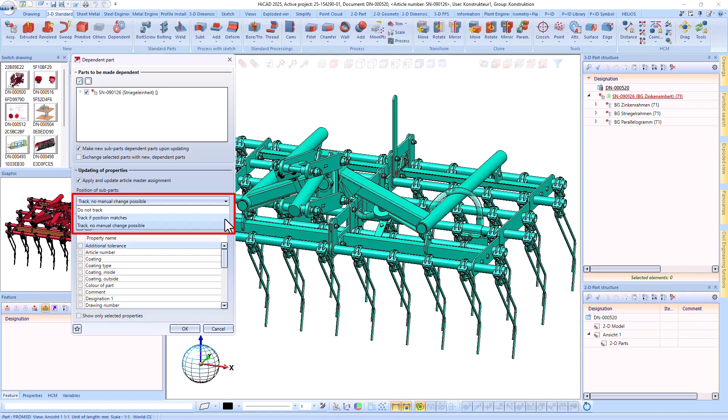In this video, I would like to show you the new features in modeling. When working with dependent parts from assemblies, the previous option "track geometrical position of subparts" has been extended. In addition to the familiar options, "do not track" and "track if position matches", there is now a new setting, "track, no manual change possible". This ensures that the subparts remain in their position and are reset if required when a manual change is attempted.

Previously, it was also possible to change the part structure of dependent assemblies. These changes are now generally prevented.

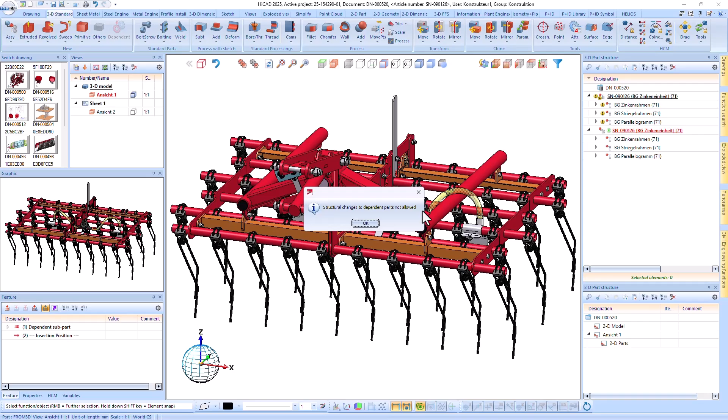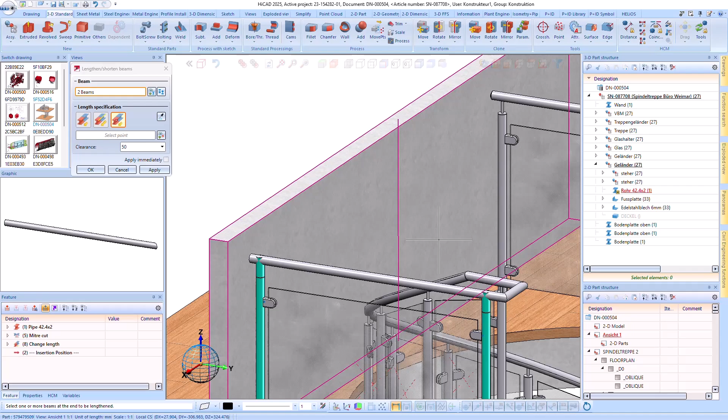A highlight in this service pack is the revised beam lengthening function. With the new interface, which is designed similarly to the lengthen sheet function, you have all the editing options in one place. Importantly, you can now change multiple beams at the same time, regardless of the type and endpoint of the beam. In addition, the pipette symbol can be used to pick the total length of another beam and apply it to other beams.

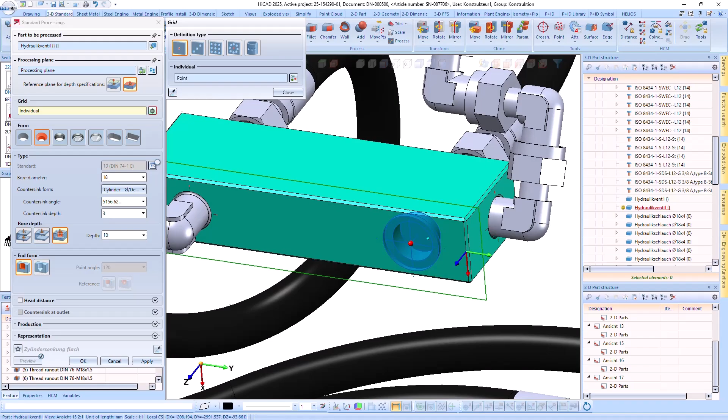Another highlight concerns the standard processings. Here, it is now possible to create countersinks as blind holes. This expands the options for creating stepped bores more easily. There is also an adjustable countersink as edge processing for bores and countersinks.

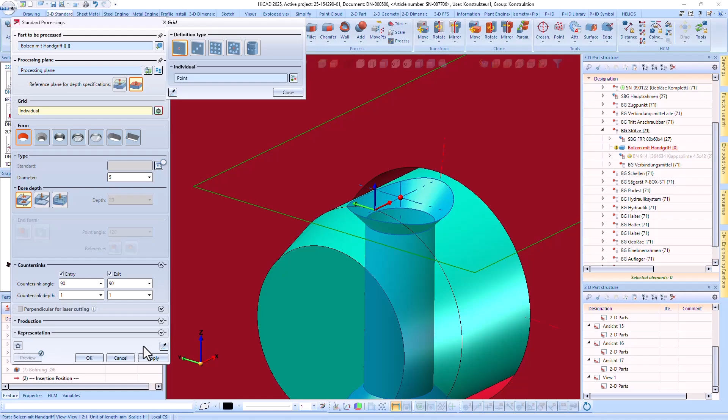Two pipette symbols are new in the dialog. One allows you to transfer bore data, the other allows you to transfer the grid. Furthermore, the insertion point is now displayed in a grid, like what you are familiar with when working with sketches.

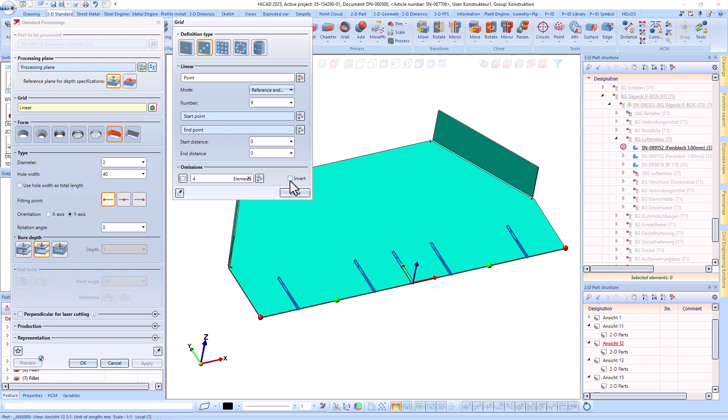As in other functions, you can now select omissions in the grid so that these bores are not created. The list can be inverted using a checkbox. Favorites management and other minor improvements are also part of this update.

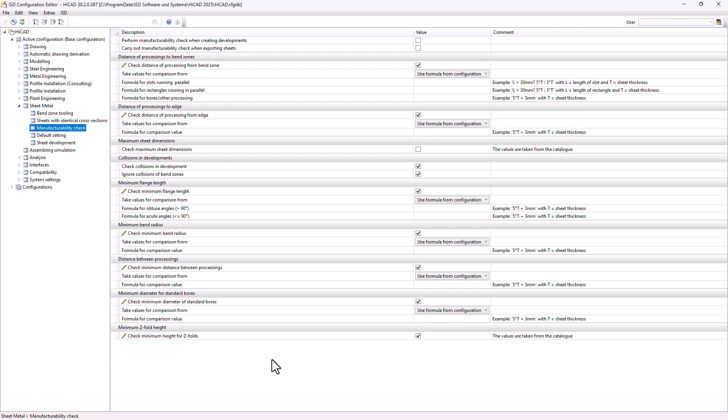The manufacturability check for sheet metal parts has also been extended. It now checks flanges for minimum length, bores for minimum diameter, the distance between processings and the minimum bend radius. In addition, an automatic function can be set to determine when the tests are to be carried out. Some checks can now also be applied to steel engineering plates.

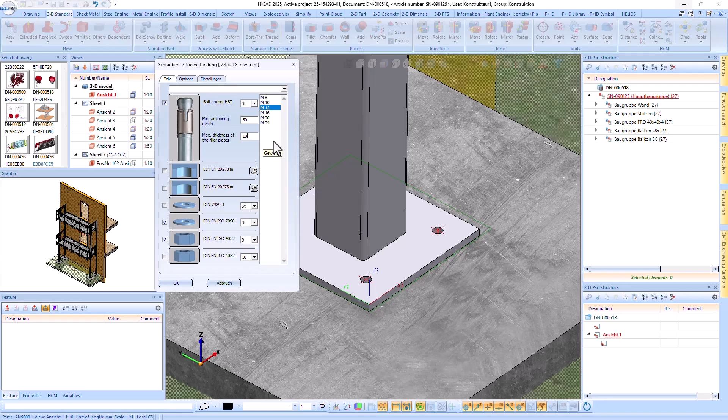In the bolting dialog, a minimum anchorage depth and a maximum thickness of the filler plates can now be set for the insertion of anchors. This solves previous problems such as incorrect selection of the anchor or collisions with cap nuts. Accordingly, the correct length from the catalog is now used and improved placement of the anchors during insertion is ensured.

There is a new column in the attribute management for describing attributes in the configuration. You can also create a description there directly in multiple languages. This description is then displayed in the text editor, for example.

Furthermore, the reference settings for attributes have been integrated into the attribute management. Previously, there was a separate location for this, but now the familiar options can be found in a new column directly in the attributes management.